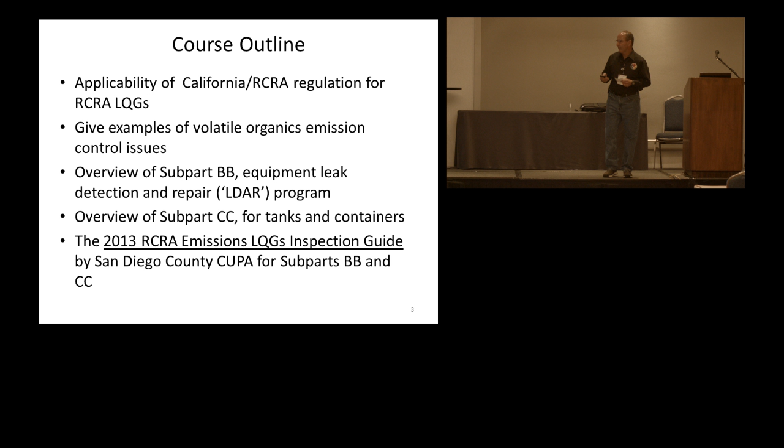We all know vapors can be dangerous. Three people were killed in Texas in the early 2000s. They were offloading a tanker full of flammable liquid waste at an oil production facility for waste condensate, and it ignited and killed three people. It's typically the vapors that are going to be harmful whenever you're transferring volatile organics and there's an escape of vapors. There's been a lot of examples where the vapors have caused injury, usually burning or death in this case.

It's a very, very famous one. The Chemical Safety Board, the national program, did a study on this, all the things that went wrong, and it really was because of no vapor control being ignited by an ignition source nearby.

It's not just 10, 15 years ago, it's happening today. In Hanford, Washington, the Attorney General is suing the DOE and Hanford, where all the mixed waste is. There's about 170 tanks of mixed waste, a lot of VOC waste and radioactive waste. The workers trying to treat this stuff and stabilize it at Hanford have been getting sick from the vapors coming from the tanks. The state of Washington isn't happy with DOE and US EPA and the Hanford people that ran the facility. They're finally going to take a RCRA lawsuit to try and force them to manage the vapors and control the emissions, because people are getting sick.

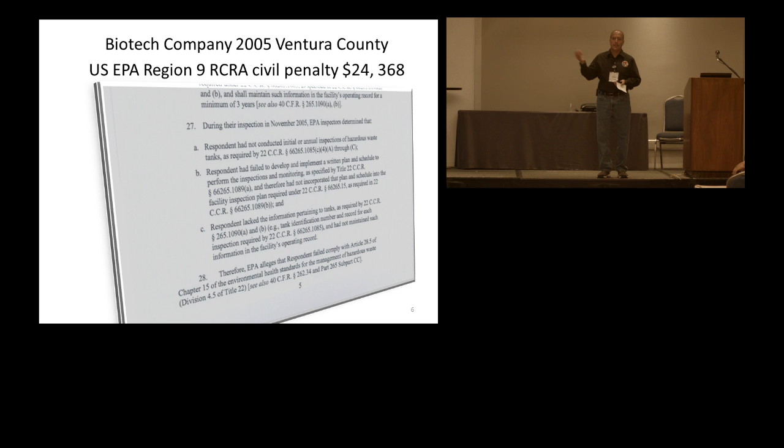The ones in San Diego we've done have been just the CUPA. But they typically go out there, find out the company has a lot of volatile organic waste with no emissions control, and the EPA calls it low-hanging fruit. It's a violation that's really easy to cite if there's no records or nobody's aware of it.

These regulations go back to the 1990s. Again, hazardous waste was something regulated by RCRA. But some of the emissions from facilities were a concern to neighbors because of the odors coming from these facilities, the ozone precursors, ones that destroy ozone, and the air toxic pollutants, things that cause cancer and so on. What EPA did is first make the rule for TSDs, and then they expanded the rule to LQG RCRA generators, so the whole country. Then all the RCRA authorized states were required to enforce the rule or adopt the rule, which California did in 1998. So it's been on the books for a lot of years.

So it goes through some simple regulations, but what is a volatile organic? For a lot of the businesses here, they kind of understand what it is, but here's the legal definition in the regulation for volatile organics using it.

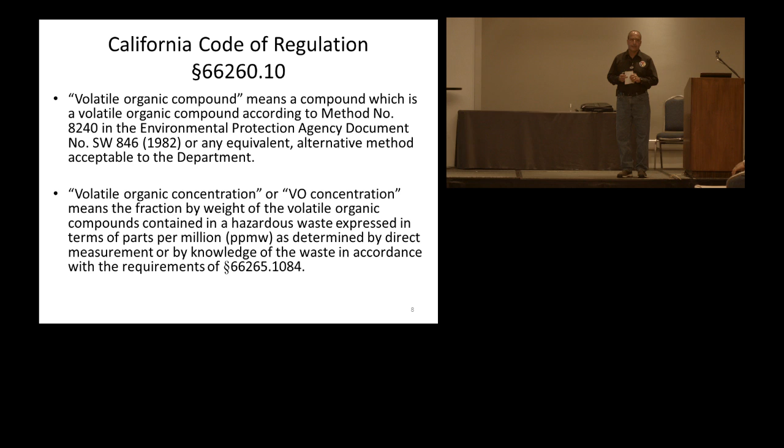The typical RCRA hazardous waste that are volatile organics, things like the spent RCRA solvents, your F-listed, the D001 flammable waste, aliphatic hydrocarbons, and then chlorinateds, and some RCRA TCLP organics, and there's others.

When I do an inspection, and I know it's a RCRA LQG, I'll look at the manifest, I'll look at waste profiles, I'll look at LDRs, figure out they got a VOC. It's pretty easy to do. I usually do that, and inspectors will do that in the office using the hazardous waste tracking system, looking at manifests, looking at D001, looking at their status as a RCRA LQG in CERS, because that's one of the questions for business activities in CERS, and the rule is going to apply. There's not many exemptions in California for this rule.

Vapors are everywhere in production, manufacturing. You're going to have vapors from tanks coming out through vent pipes, through condensers. I've inspected condensers at steam strippers and air strippers in San Diego that are treating wastewater with organics. You can have it from valves, from tanks here. So vapors are pretty much in all manufacturing if there's a flammable liquid being used or applied.

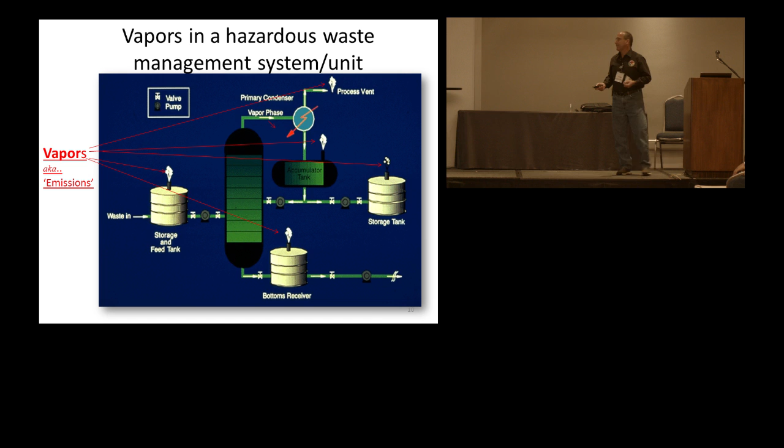Next 20 slides or so, I want to give you examples of some pictures from inspections we do in San Diego. This is one we did just a few months ago.

Biotech. This machine generates some waste solvent, goes down to the floor, I'll show you in a second. Then the piping for liquid waste goes up through the ceiling of the facility, and they have a PVC vent for the vapors from the production equipment.

That PVC vent is vapors from production, not regulated under Subpart BB or CC, because it's coming from a manufacturing process unit. Think of it like an auto body shop spray painting auto body paint. Those emissions are controlled by the Air Pollution Control District, not by these rules, because it's manufacturing solvent that's actually being evaporated off. These rules deal with waste, waste tanks, waste piping.

So this unit right here, the waste is the unit that we regulate under the rule.

When I did the inspection in November, I looked at this PVC and the chemical composition, and I said, are you guys sure PVC is compatible with your waste solvent? And it isn't. This is going right through the ceiling up to the roof. So now they're going to revise that piping, the PVC piping, because when they ran the chemical compatibility, it dissolves PVC. The solvent, methylene chloride, was the chlorinated one.

It's twice I've seen biotechs put PVC piping in with methylene chloride being one of the solvents, and it says if you do run a compatibility check, do not use PVC. I referred it to the Air Pollution Control District as well.

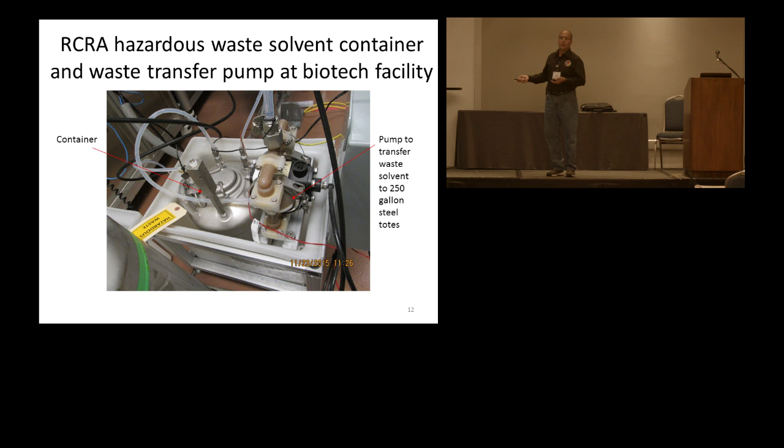So the volume was continuous. They did 9,000 gallons a year of waste solvent, and they were in production. This company had, I think, peptide manufacturing, peptide synthesis. They would transfer it from this little pump through some flexible piping that was double-walled out to the totes in the 90-day area.

Close up on the pump. The metal tag was a good indicator that this company knew about the air emissions rule, because you're required to actually tag your equipment with identifying equipment markers. So that was a good indication when I first looked down and saw it that they had a clue about this rule. It's a national company, so they've had Subpart BB and Subpart CC inspections in other parts of the country from other regulators.

Ultimately, that pump took it out here to their 90-day area, and the vapors dropped into an activated carbon drum, incoming and outgoing. What caught my attention was they had no label on it for activated carbon. This is to control the vapors coming from the totes.

And then they had a little pipe connected to an exhaust system. So what they kind of developed was something to suck the vapors from the totes over to activated carbon and treat the vapors like the rule requires. It's called a control device. Activated carbon is very common, but they put a little vacuum on it by putting it into an exhaust system.

So I was a little concerned about that. I saw that they had metal tags hanging from everything, again a good indicator that they're complying with the air rule. But I was concerned that as they pulled a vacuum in and out to suck the vapors out to the roof, they were saturating the carbon, and it actually did occur.

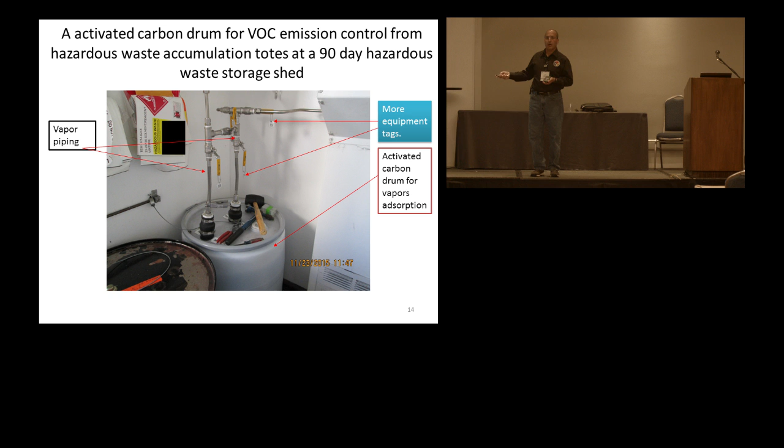So 95% of the vapors need to be collected or adsorbed in the carbon. They saturated it way quicker. But they purposely had this vacuum designed by the engineer to draw the vapors to here.

A lot of the regulations I'm talking about are found on EPA's website, which has a really good resource to look up the regulations for air emissions. So I put the web link.

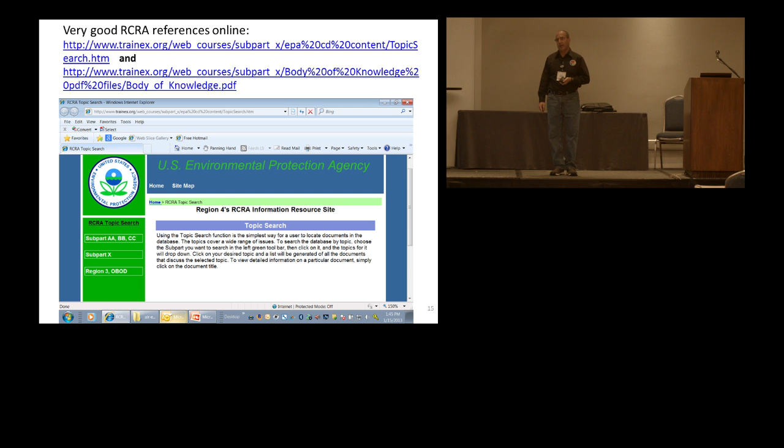Applicability is RCRA LQGs, so your 90-day hazardous waste generators. Got to be RCRA waste. Containers that are more than 26 gallons in size. We'll go through that a little bit later in more detail.

And the regulations are found here in California. Like I said, they adopted these regulations in 1998. The feds call this Subpart AA and BB and CC. California calls it articles. So when I refer to AA, BB, and CC, it's really the articles in Title 22 California Code of Regulations.

And real important, if you're a generator or inspector, you don't apply these rules to non-RCRA waste. It's got to be RCRA waste. So it doesn't affect non-RCRA generators for California only hazardous waste, which is kind of a relief for a lot of businesses. We don't have very many RCRA LQGs, but I'll go through some examples in further detail.

We made a guide in San Diego. I haven't revised it. It's pretty much the rule has been static since 1998, so it's still valid. Can you use it? Again, I uploaded it to the website, and we have it on our county website as well for the CUPA in San Diego.

When I looked at the EPA regulations, they were so confusing, and California adopted them. A big part of transferring it and making a guide was just pretty much making sure the regulations, the numbers matched or corresponded, and that was the big time-consuming task, because California has their own numbering system, of course, and their own reference, Title 22.

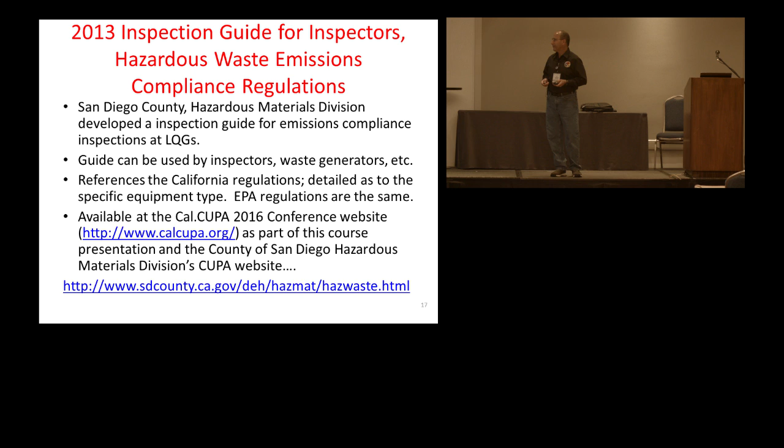Some of the examples we'll go through: Navy training torpedoes, a large Navy base in San Diego. They have to clean their training torpedoes. When I heard about this, I go, wait a minute, torpedoes, those things, don't they blow up during their training? Well, they actually have ones that don't blow up, and they go and retrieve them, bring them back to Point Loma in San Diego, and then they have to clean them out.

The fuel inside these torpedoes is very toxic, and they have to use a solvent to clean it out. Mineral spirits is what they use, and it generates a lot of VOC waste as well as reactive waste, so it's pretty nasty stuff. The fuel's like $300 a gallon. It burns underwater, of course, and it's very expensive.

Aircraft stripping operations. The Navy has giant aircraft stripping where they strip off coatings with methylene chloride. They're trying to get away from that, and they will have a lot of waste generated from that process.

Pharmaceutical manufacturing is the most common one I've seen in San Diego besides the Navy. They have a waste solvent transfer system. So if you're a business designing one for waste solvent, if you're a CUPA inspecting one, a waste solvent transfer system, they're sort of in vogue.

I have plans on my desk now from a large biotech wanting to put one in from their labs and production out to their 90-day shed. And they want the county to look at it and see if the required rules apply. Is it a tank? And they don't want to be a tank system. And the air emission rules apply. So they pay the county for consulting services, and we're looking at the plans.

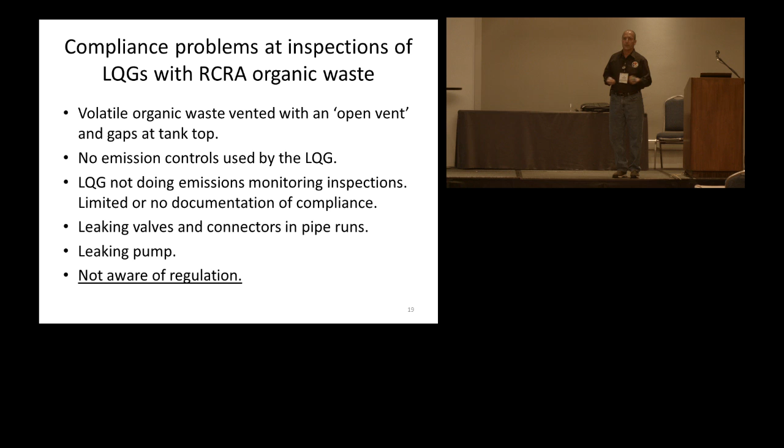Some general rules with vapors: the higher the vapor pressure, the more volatile. That's obvious. Gasoline, methylene chloride, all those are really high vapor pressures. The vapor pressure of water is 2.3.

Compare that to methylene chloride, 45.2. So you can see how, if you ever used acetone for wiping, it evaporates very quickly. That's the vapor pressure for acetone.

The higher the temperature, the higher the vapor pressure. That's a pretty standard rule. And vapor pressure is the measurement above the liquid in a confined, closed system.

Generators, inspectors, the manifest tells you what kind of waste it is. This is an example, waste flammable liquid, 4,400 pounds.

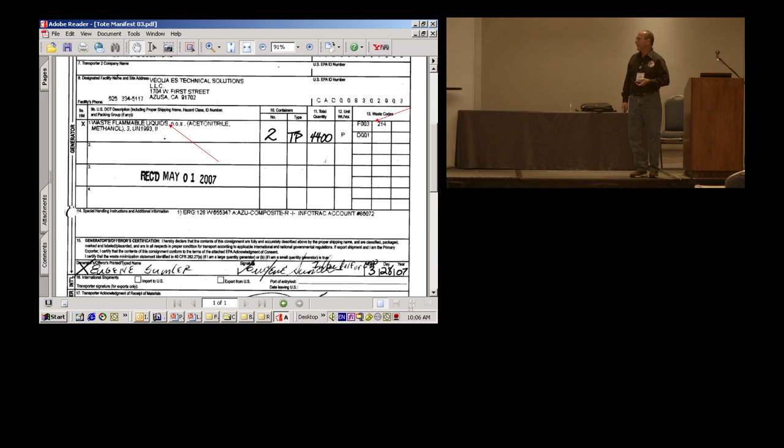Company that had, again, a waste solvent transfer system, biotech, very large and well-known biotech in San Diego. All their waste went into these totes in a small room inside the building. It was well above capacity. They were always filling these totes up daily because their manufacturing took off.

The product took off after FDA approval. So they had real problems with vapors. They opened the doors up, and the vapors were really, really bad. The manager said, we're trying to get this moved outside. It's a capital improvement, $1 million plus.

They wind up doing that. They had done a health and safety analysis for workers, a health risk assessment, and it was really bad because of methylene chloride as well as some flammable liquids. They had a wall duct that tried to suck out the vapors, but they had no air district permit.

So in San Diego, for biotech, there's a biotech rule where the Air Pollution Control District—I don't totally want to say I understand their rule in San Diego—but sometimes they'll require a biotech need an air permit, and sometimes they won't. In this case, they didn't require one.

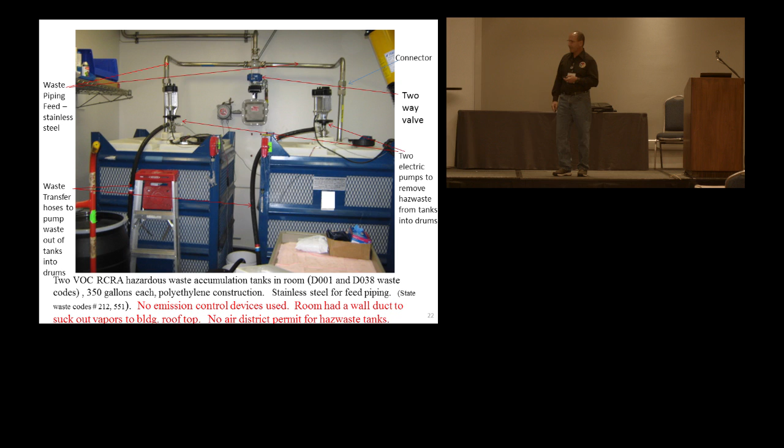That changed though. After they moved it outside, they no longer had the exemption, I guess, for the Air Pollution Control District, and they had to put in all kinds of special air emission control at the tank top—little motors, it was not very safe.

Flammable vapors, electrical pumps, just closed up on the top of the tank, transfer hoses. And the manager really wanted to get this outside in a big bulk tank. They wind up moving it outside. Instead of totes, they had a 4,000-gallon waste solvent tank with stainless steel piping, double wall, met the rule.

Spent a lot of money putting it outside. It was much better, much safer to do that. And they met the requirements.

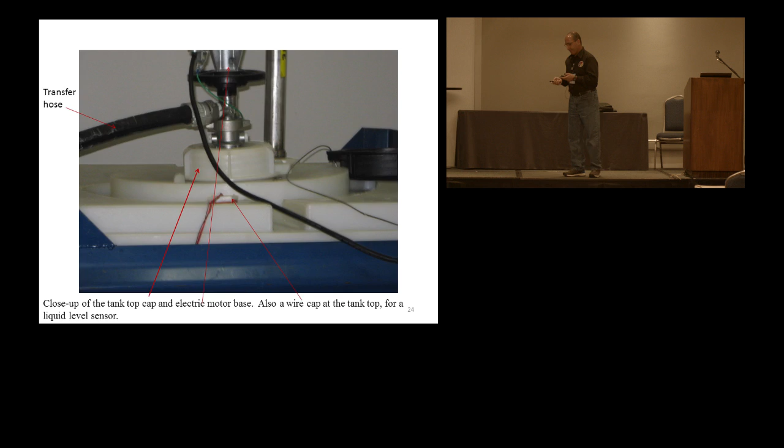Another biotech facility, they put a shed. The cap is open on top, hard to see, but they leave the cap open to let the vapors escape when they're filling it. The headspace has to go somewhere, right?

So they left it open. Not only do you have a generator open container violation, but you have a Subpart CC violation for emissions, because they leave it open all the time, apparently what they were doing. Because they had a transfer hose, and then they didn't want to remove the hose every day.

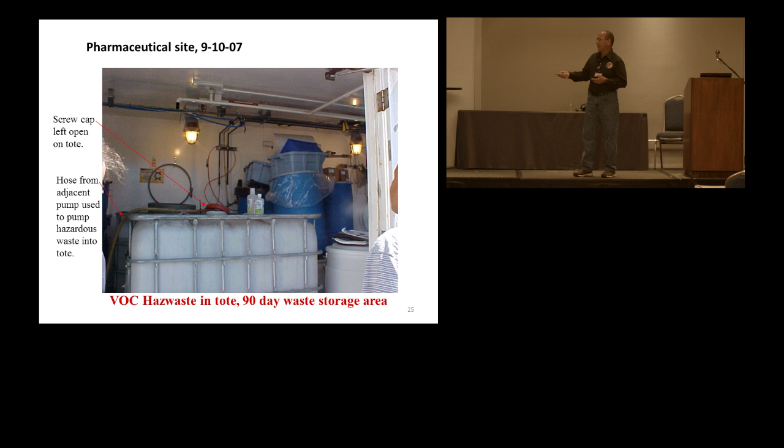Just a close-up on the hose and the loose cap. Very common with VOCs and totes for companies to leave a cap loose or off for the headspace to go somewhere. And if it's volatile organic RCRA waste, you've got not only an open container violation, but the air emissions violation as well.

This company, we didn't do enforcement because we wrote up all the violations, and then they complied. This was like 2007, so it was pretty fresh. A lot of large quantity generators are used to 90-day storage requirements, generator basic rules, contingency plans, CERS now, but they don't get this. So we have to kind of slowly help them.

That's why I made the guide.

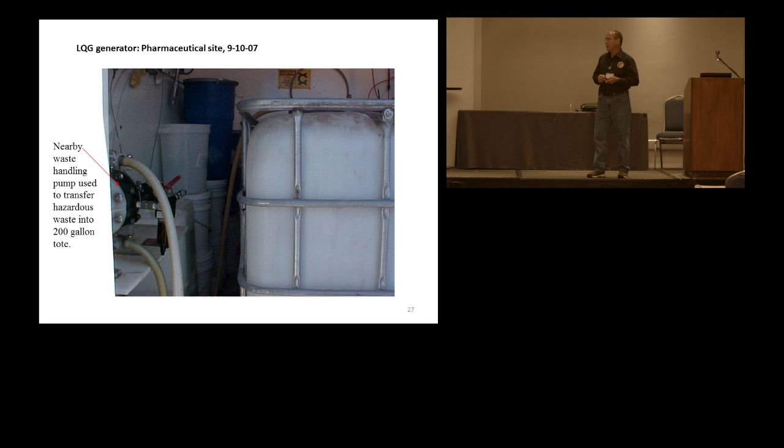This is the transfer hose. One of the rules you'll see in a little bit is when you're transferring VOC waste from small containers, drums and things, into a tote, you can't really have any top loading or what's called splash loading. Because if you're doing it from the top, it's splashing in and all your vapors are kicking out. You have to have submersible entry of the solvent or liquid pumping into it, so you have to submerge it down through a pipe or a tube. Makes sense. If you have top splash loading, a lot of VOCs will be escaping.

This is the violation we gave for the LQG. We not only did the generator violation for open container, but we cited they had the 200-gallon tote set up to allow vapors to escape pretty much 24/7.

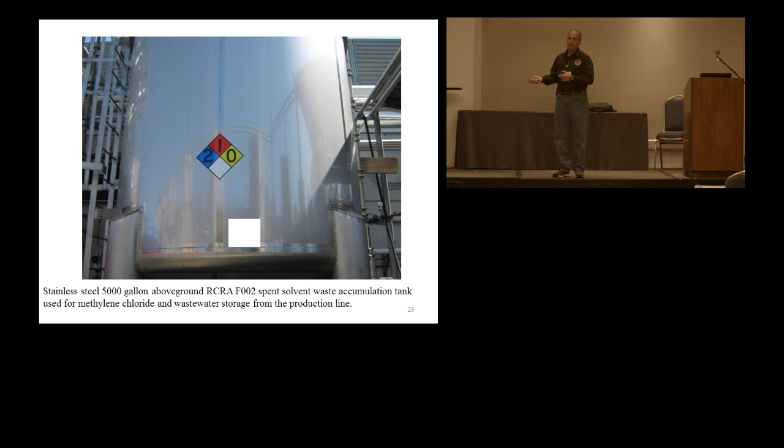This is a wastewater tank with methylene chloride, F002. So I know it's a RCRA solvent. They treat the methylene chloride in the wastewater to get the wastewater to meet sewer treatment levels, and then the methylene chloride is stripped off and then collected and disposed of as hazardous waste.

A lot of piping, waste solvent waste. So if you're an inspector going into a place cold and you see all this, you're not only thinking about hazardous waste tank system standards, but you should be thinking about Subpart CC and Subpart BB. In this case, all three rules - Subpart AA even applies because they had a steam stripper.

Manufacturing, the company makes a drug that they sell overseas. They got permission from FDA to sell it in the United States, and it's like a wonder drug, a narcotic they use for IVs in all kinds of surgeries. So they took off with their product in the last several years. They were doing R&D for 20 years, got FDA approval, and put this whole system in just to treat the wastewater, because they were continuously making two shifts a day of this IV drug that was in popular demand.

Again, just close up on the markings. If you're an inspector, you see that, you're going to think of tank rules, and you're going to think about the air emission rules.

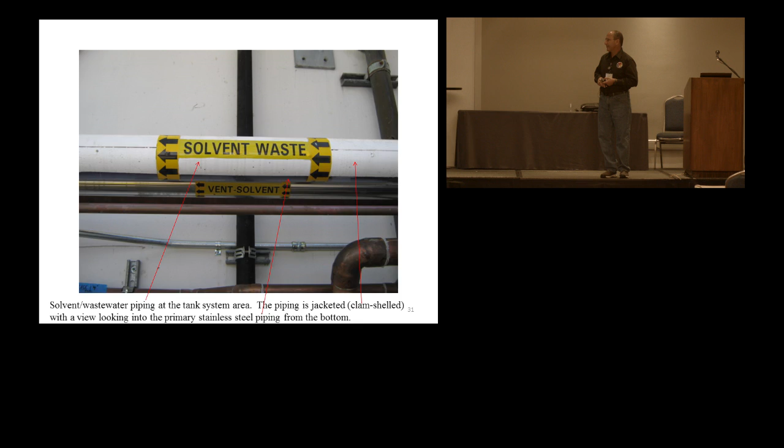It can be kind of daunting if you're an inspector to have to inspect all the piping. For this system, the wastewater had all kinds of piping and pumps, and they had manufacturing vapors coming out here from their reaction vessels where they were making the drug. They had liquids coming from the reactors inside the building. They had wastewater coming from the washing of the reactors - after every batch, they had to clean the reactors they were making the drug in. They had return lines, steam lines, all kinds of piping to deal with. So it can be kind of daunting.

I knew it wasn't in compliance. They had nothing marked. All the connectors need to be marked with a metal tag or some kind of tag indicating the equipment ID number and what kind of VOC waste is in that particular piece of equipment. So I knew right away they weren't in compliance with the Subpart BB rule for piping.

They were doing the PE assessment. They had it done for hazardous waste tank systems - double wall, leak detection, secondary containment. But they had no air emissions monitoring, which we'll talk about in more detail.

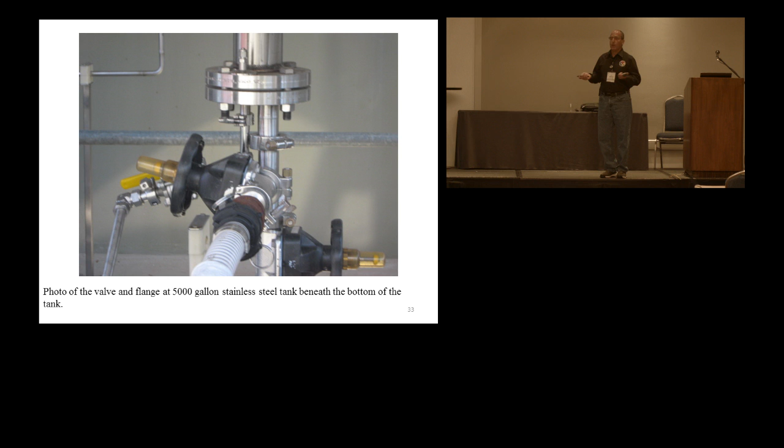Again, just close-ups - all these are potential leak points for vapors. And the thing about vapors is, as inspectors, we're all used to looking for drips, liquid, or maybe we smell some odors. Here you smelled odors all the time. They're doing 20,000 gallons of wastewater treatment daily - that's how much waste. So these things, for volatile waste, they can be leaking and evaporating and never drip to the ground and leave a stain or a wet mark. That's the insidious nature of vapors or vapor loss. And methylene chloride being toxic - not flammable, but pretty toxic.

Again, close-ups on pumps, just showing that nothing was marked, lots of connections. Companies spent a lot of money coming into compliance after this. They had to get a consultant, or at least they wanted a consultant who had experience in the air emissions rule. This is a steam stripper.

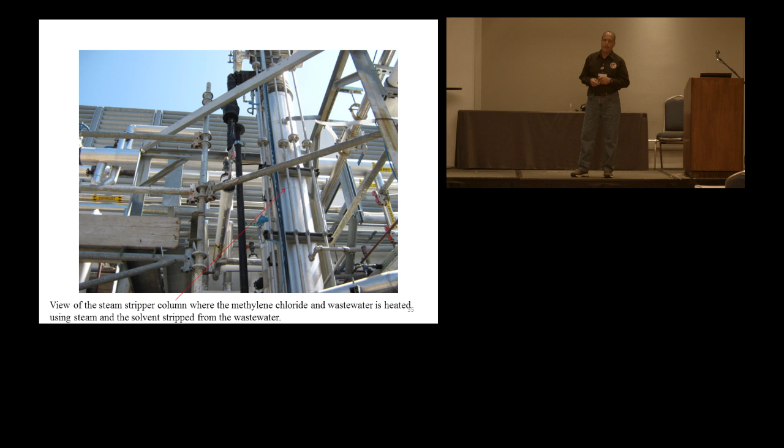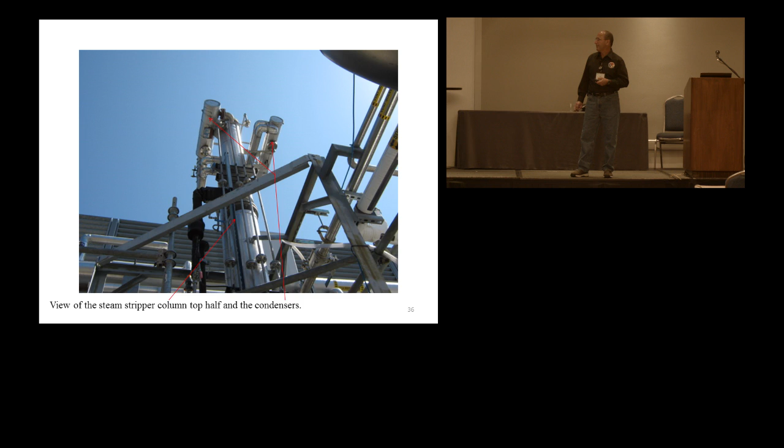They had to strip out the methylene chloride from the wastewater. Now they have two towers of steam stripping to strip out the methylene chloride from the wastewater. Just to show you - condensers at the top which condense the methylene chloride, and then you get liquid, you pump it down to a decanter or another storage tank for waste, which is what this is right here. They had about 200 gallons of spent methylene chloride that was stripped off from the steam stripper.

Very expensive, multi-million-dollar wastewater treatment. Refineries are going to have this. Manufacturing facilities are going to have this kind of equipment. LA probably has a lot more than San Diego, I'm pretty sure.

Again, just a close-up on the back side of what they call the decanter, which is their waste methylene chloride, with a little plastic sight glass.

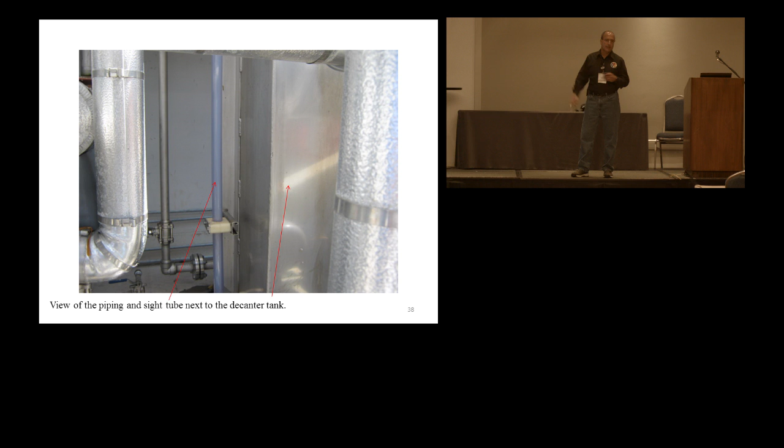When I see plastic and solvents, I start thinking about compatibility, because I used to do emergency response. In the old days, there were a lot of responses from leaks caused by incompatible materials, where they used plastic to convey or store a solvent, and it just eats away. So I'm really focused on that, and I've found a lot of problems.

Ultimately, from the decanter it goes into the drums. You see a pretty good VOC system, but nothing's being monitored, nothing's being tagged. So the violations were failing to have a monitoring and inspection plan, failing to identify the waste solvent on paper. They had manifests, that's all they had, and then marking all these connectors with tags.

Carbon adsorbers are common when you have VOC wastewater or VOC waste from totes. They're the normal rule for LQGs in pretty much the whole state. They're simple, but the problem is there are two types: ones you regenerate with steam, and ones you don't regenerate. Those go off in a drum, or get changed every 90 days or when they become spent.

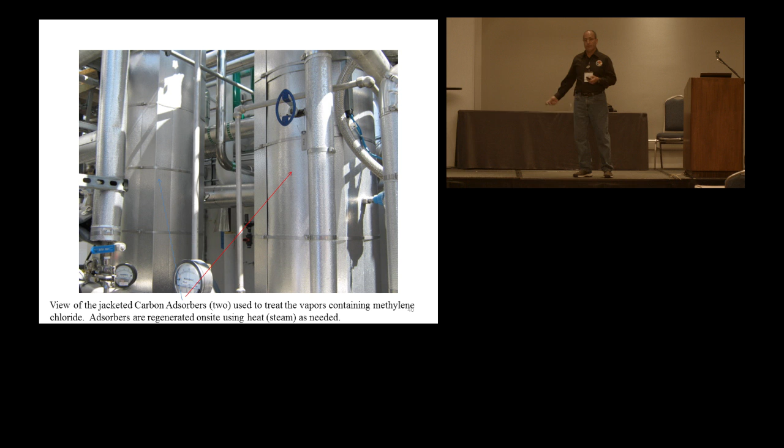Fuel terminal in San Diego. They have oil-water separators, really fuel-water separators, in the ground here. From over there, off the picture, is their loading racks for gasoline tankers. They have a spill, it goes into a drain with a lot of water, and goes down to the fuel-water separator underground, and they have to do something with that wastewater.

They don't have a sewer connection for this terminal. So they try not to have spills and overfills at the loading racks for the gasoline terminal, but they have them every day.

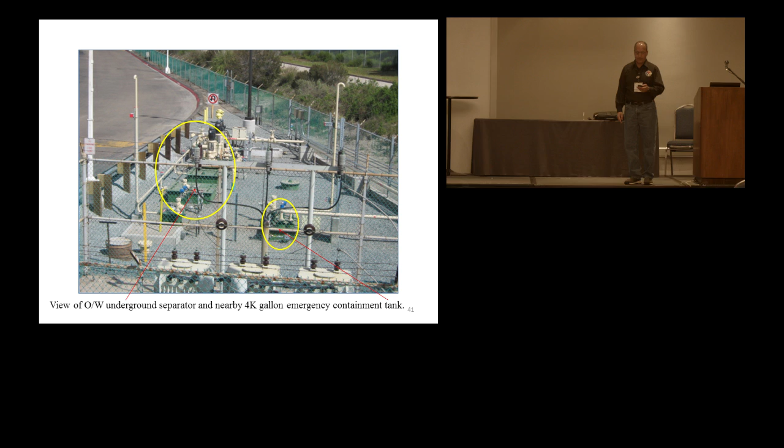Ultimately, the wastewater from the oil-water separator goes into an 18,000 gallon tank. That's right here, and that's the label on it. It's hazardous for benzene and gasoline - residual, not pure product. It's really wastewater with some benzene, RCRA TCLP organic benzene, and some gasoline.

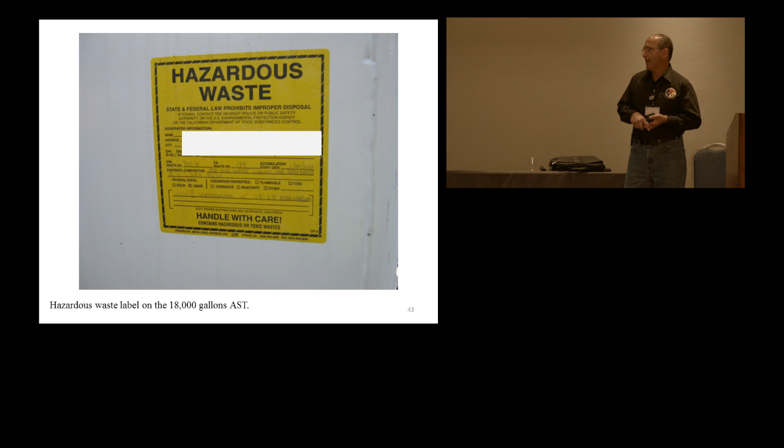So what I had them do when I saw this, I asked how they were venting that 18,000 gallon tank. They had a vent that looped up and over. I asked if it was an open vent, but first I asked, is this a VOC waste? They said yes, it's RCRA benzene with benzene and water. I said, give me your waste profile, your sampling data. They gave me the data back, and ultimately it was below 500 parts per million, so they were not subject to the regulation.

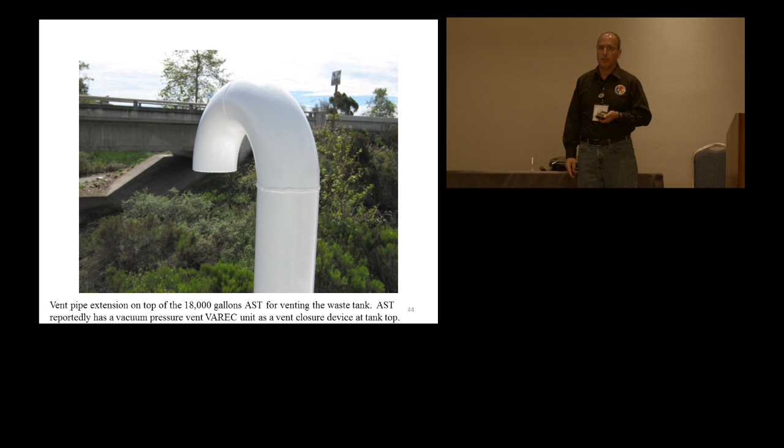They were just barely below, which is a threshold we'll talk about in a bit. But I brought out a PID, a photo ionization detector, held it up here, and got about 200 parts per million in the vent. I'm thinking there's got to be 500 parts per million or more down in the tank, so I made the generator do a waste classification for volatile organics.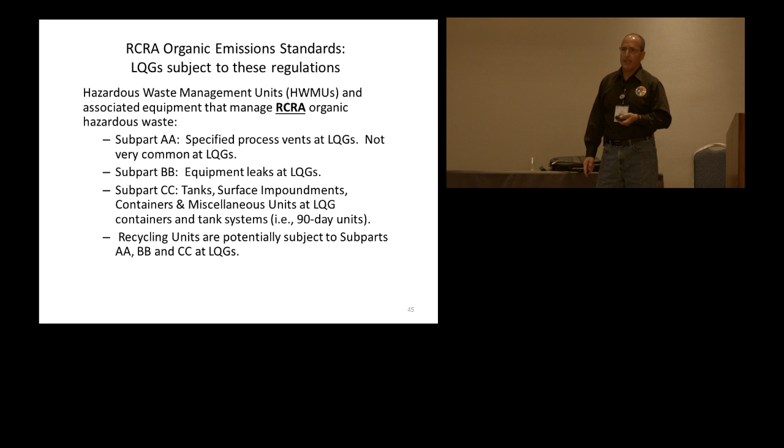The lack of awareness by LQGs, and by inspectors, is pretty high right now, I've seen. A lot of times they'll think, well, the Air Pollution Control District regulates me, why is the CUPA asking questions about it? But depending on what rule they're complying with at the air district, they may still be subject to the air emission requirements.

The last one I did just a month ago, the consultant and the company came and said, we have an air permit, we're exempt. And I said, well, you have to do this, this, and this to meet the exemption under RCRA, which is pretty much meeting the Federal Clean Air Act - which they weren't meeting, they were meeting a local rule. So they went back to the drawing board. I'll talk about that more.

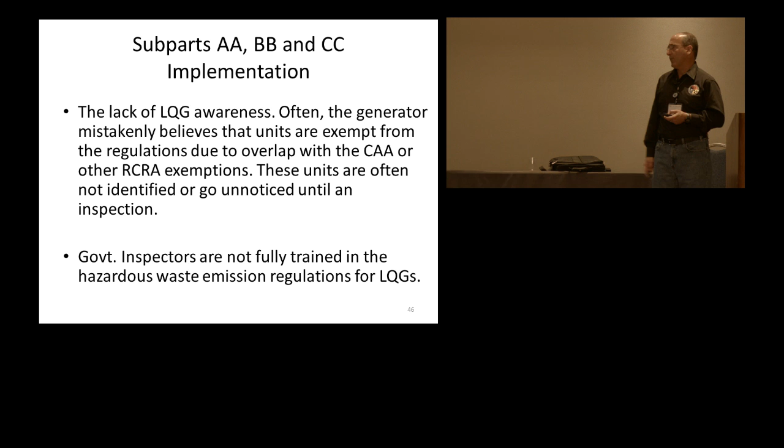And inspectors aren't really trained or fully trained, so we're trying to get the word out. It's authorized by the EPA - states have to do this as part of their RCRA program.

And again, for LQG RCRA, it's usually BB and CC. A lot of exemptions under the federal rule do not apply in California, because California does not adopt a lot of the federal exemptions.

They're really specific to equipment, and we'll get into detail about that. And as I mentioned earlier, if it's production solvent vapors, that's not regulated by this rule. It's the waste part of it, the discards from production.

Usually the manufacturing, like Air Pollution Control District, that one - methylene chloride wastewater - they regulated the heck out of the production area, the reactor vessels and things, where methylene chloride was going in pure concentrations. And all that VOCs from manufacturing had an air permit. But the wastewater, which was trace levels to them, below 1% but above 500 parts per million, which is the regulatory threshold we're going to be talking about, they go, oh, the CUPA handles, or the county health handles the wastewater. We only handle the vapors from production, manufacturing, coating, and so forth. So there's a loophole in some air districts where they focus on the pure solvent being used, coming off manufacturing, and they don't focus on wastewater with low levels of VOC.

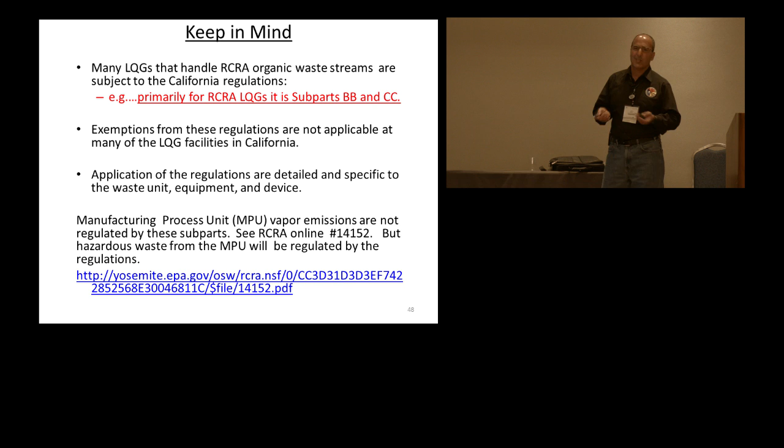If somebody says an LQG isn't subject to the rule, they have to meet, like I mentioned, Clean Air Act parts - one of these parts - with performance standards for stationary sources and national NESHAPs. They have to have operating emission controls, and they have to have records. Everyone I've done who's verbally said we're exempt because we have an air permit, they don't meet these three. They haven't met one yet.

Now in LA, South Coast Air Quality Management District may be tougher, maybe a little bit more looking at the federal requirements, because LA has more challenging air emissions than San Diego. But in our air district, they don't really look at parts 60, 61, and 63 of the Clean Air Act. Usually these are major manufacturing facilities, like refineries and chemical manufacturing facilities, that have to meet these rules for wastewater, waste solvents, waste coatings, and fuel production.

If there's an exemption they claim because there's an exemption in the federal rules - well, you're not going to get out of Subpart CC by saying you're exempt from the Clean Air Act. And they have to have emission controls. They can't average out their emissions and so forth. It can be a little challenging for businesses that come in and say it's not applicable, that they're exempt. But like I said, in 100% of the cases, no one's been exempt.

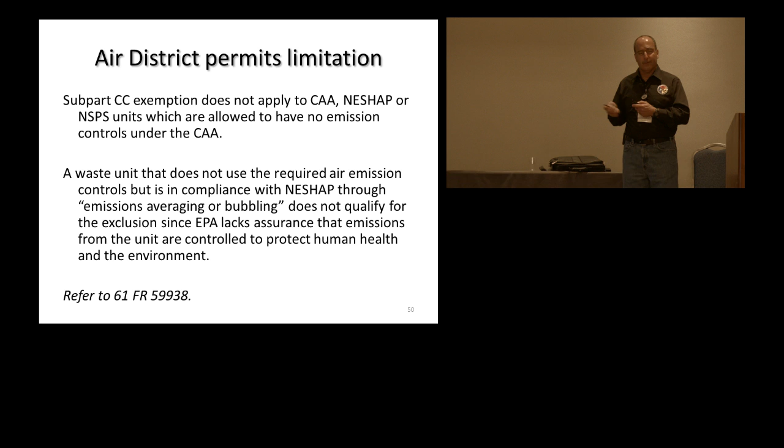And EPA has been interested in this topic. Region 9 hasn't really done a lot of outreach, but they've been interested because I've kind of been pushing it more at the CUPA level, at the higher level. And so they say they're going to make it a priority in the future as part of their air toxic initiatives.

And again, as I mentioned, sometimes they believe the air permit exempts them. And that certification is a scary thing if the person's just signing it and not really realizing what they're signing. One company was going to do it, but I told them to really think about it, because they don't have any equipment ID marked. See, the one thing about the overlap is the Clean Air Act.

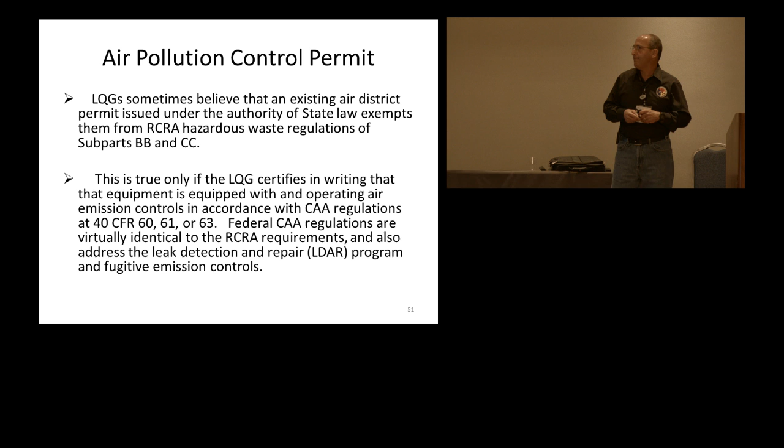If you comply with the Clean Air Act, the same rule applies - that's the exemption where you don't have to meet Subpart BB because you're already meeting the overlap rule. So the equipment has to be marked. You have to have a monitoring plan and inspection schedule, and when they don't have it, they're not meeting the Federal Clean Air Act. So it's something that needs to be looked at.

The key thresholds are 10 parts per million by weight for AA. Subpart BB is your leak detection and repair - that's greater than 10% by weight. And Subpart CC, for tanks and containers, is 500 parts per million by weight.

So AA is your air and steam strippers - that's what that regulates, process vents from that. BB is your piping, pumps, and valves, your piping runs. And CC is the end, which is your tank or containers that have a VOC waste.

A little bit of nuance about AA and BB. The total organic concentration, where CC is an average volatile organic.

The biggest issue is when I ask for the waste determination from the generator, they'll give you a profile, they'll give you a manifest, and it may work, but this rule actually has a waste determination regulation in it. It says you shall determine your organic concentration for your volatile waste and keep records of it by knowledge or by testing. We'll go through that in more detail in a second. And if anything changes, they need to update it.

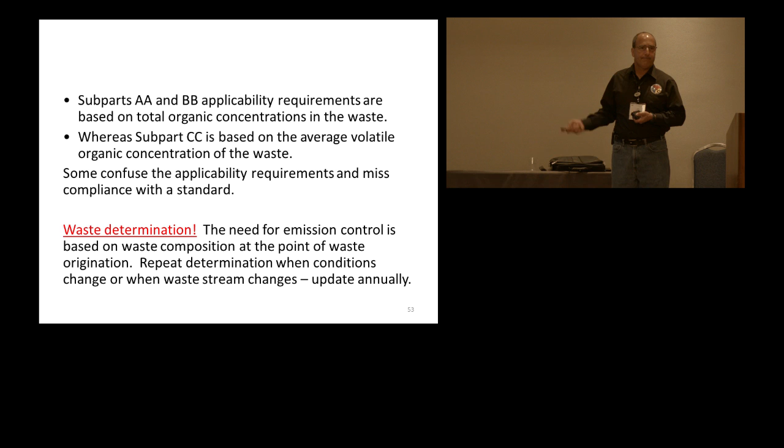The ones that have done sampling, I tell them to be careful because if they do it wrong, a lot of volatile organics escape if they're not doing it in a measured manner. If they're just throwing it into a jar with a lot of headspace, the volatile organics will escape. So there's a certain unique way of sampling volatile organics with minimized bubbles, zero headspace, and the right sample jar. It's totally critical. They can't just use a mason jar or a big 16-ounce jar like we're used to using in the CUPAs when we take samples.

It's got to be representative. If they sample the waste not at the point of generation, that's not representative. It's got to be at the point of generation, not in a consolidation tank, down gradient.

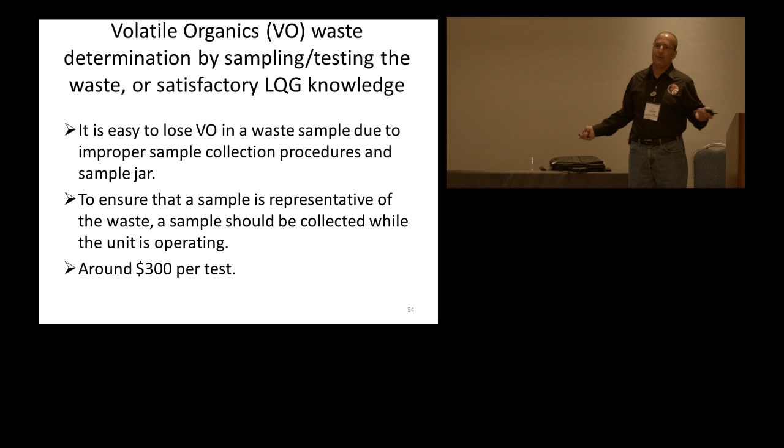So they can demonstrate compliance through record keeping and implementation. Employee training is important, for the employee assigned to go out and do the leak detection and vapor monitoring. And they can kind of do it at the same time as doing their tank system inspection, if they can.

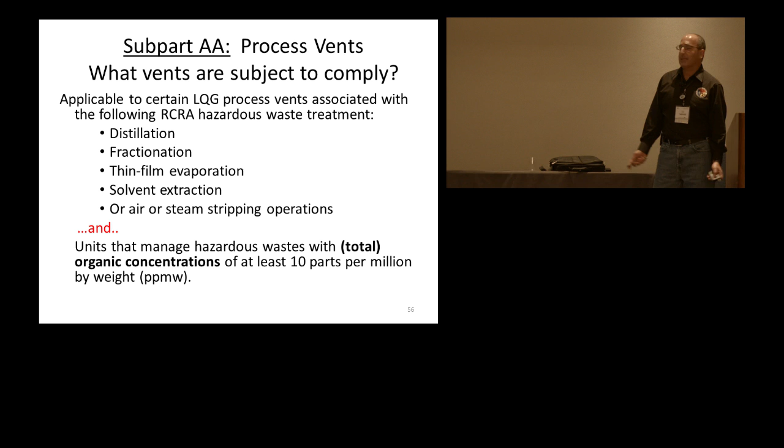Subpart AA is really, for LQGs, about air or steam stripping. These waste treatments for solvent are not very common at LQGs. Some may have distillation for solvent recycling on site, but these are typically TSD facility operations or bigger facilities. And again, 10 parts per million is not a lot to be subject to Subpart AA. That's very little in the waste, but it's got to be RCRA waste, just to emphasize that.

The definition of process vent in AA is pretty much an open stack or open pipe that needs to have a control device or a closure device. I'll give examples of that in a little bit, when it's associated with that solvent treatment or VO treatment.

The biggest thing about AA with the steam strippers and air strippers is they have to have control devices on all their process vents. Nothing can be open, evaporating 24/7 to the air.

Now, because AA is so uncommon, I'm going to focus on BB and CC, which are very common at LQG RCRA generators. But again, that's for tanks, containers, and piping with volatile organic waste.

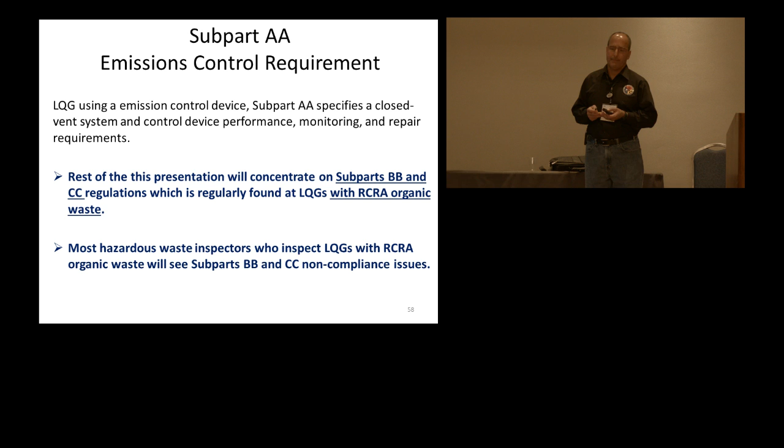BB is called the LDAR, Leak Detection and Repair Program. So it makes the generator inspect for leaks and repair them. They have an active program in place, meeting basic requirements in the rule. And really, the whole idea is to make sure the facility cares about their vapors, about vapor loss and leak detection.

Because if something is leaking and weeping very slowly from a pump or from a valve or a connector, and it's highly volatile, you don't see a drip. You may smell it, but there's no sign of leakage if it's highly volatile and you've got a weep occurring. So this program captures those leaks using monitoring.

Again, RCRA LQG, and then 10% for Subpart BB. So that's a much higher concentration of volatile organics for the Subpart BB rule, 10% or more.

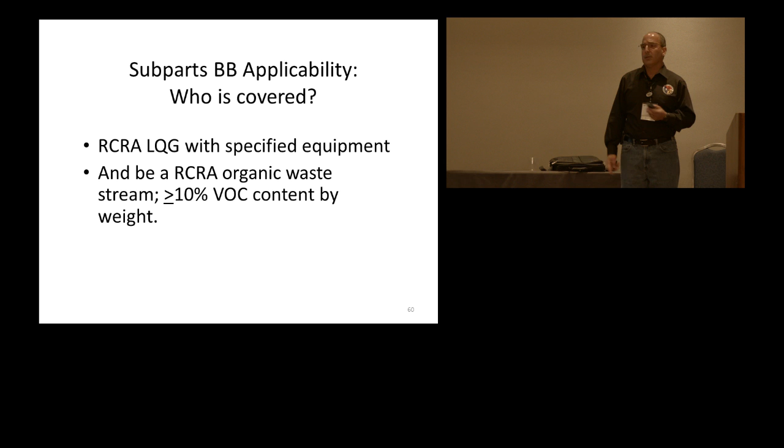And for anything that's flammable liquid waste, the thing about CERS is now for waste, they put the composition or components and percentages in CERS. I can look at a CERS, see they're a RCRA LQG, look at their inventory in CERS, see the waste composition, and before I even get in my car to drive to a facility, have an idea whether they have more or less than 10% VOC in their reported waste in CERS. CERS has been a really good tool, as well as the hazardous waste tracking system that regulators have access to.

All this equipment is part of the BB rule. Pumps, compressors, devices, sampling connection systems, open-ended valves, flanges, and all those things at the bottom - the pumps, the valves, etc. - they all kind of are common at LQGs.

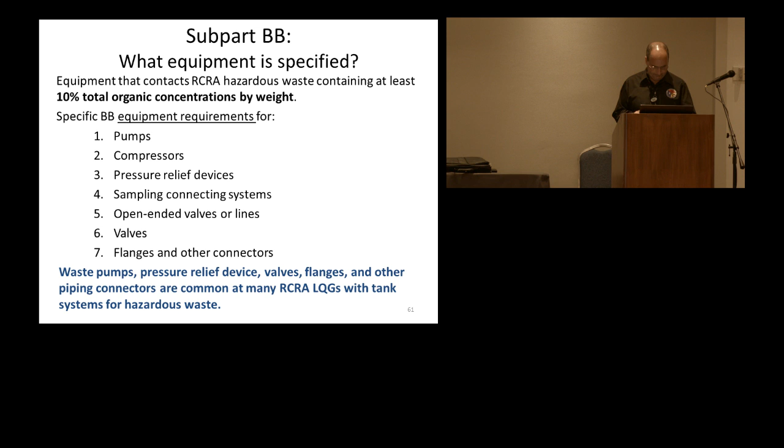There are some exemptions in BB: less than 300 hours a year for the piping, equipment's in vacuum service, and of course SQGs are exempt and non-RCRA is not regulated.

The 300-hour thing - one of my generators said we use our piping intermittently, and so we added up through the whole year, and it's like 200 hours, I forget the actual number. And I said, well, you look at the Federal Register about this rule, and EPA says to get an exemption for BB for the 300-hour rule, after you finish your intermittent transfer of waste solvent to your tank, you have to then flush it with a clean material and decontaminate it. If you don't decontaminate it, the 300-hour rule is not going to work, because they want you to decontaminate the piping run between intermittent use in order to use that 300 hours or less.

They weren't doing it, and so the 300-hour rule didn't work for the company that said, hey, we're exempt, we're less than 300 hours - and you got to flush it through and clean it. The idea being, EPA, when they made the rule, they gave the reasons why you decontaminate the piping and clean flush. It made sense when you read the rule.

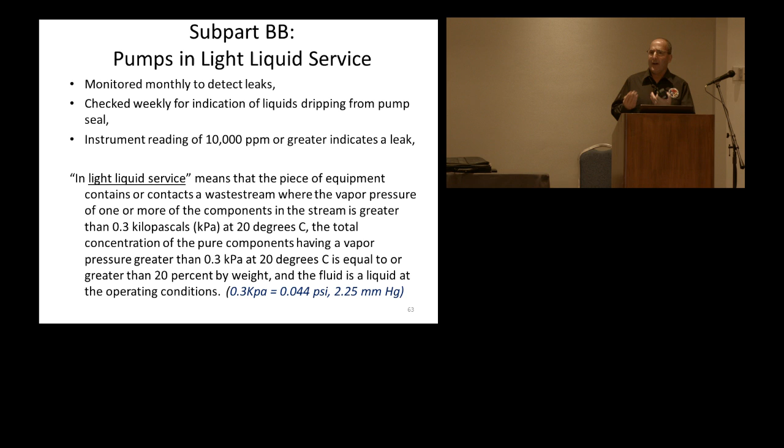Each piece of equipment in BB has different monitoring standards. For light liquid service, which is more highly volatile waste versus a heavy liquid - we'll talk about in a minute - you got to do a monthly monitoring and then visually check weekly. And then 10,000 parts per million on a PID, photoionization detector.

So the money to comply with this rule for a business - you got to have a PID, employee training, PID calibration, tag all your different piping run and all your valves, connectors, pumps, etc. So there's a lot of upfront money as well as continuous money that has to be spent if you're dealing with this rule. So businesses don't like this rule, but if they're in, they're in, and they would have to get away from the thresholds and the volatile organics.

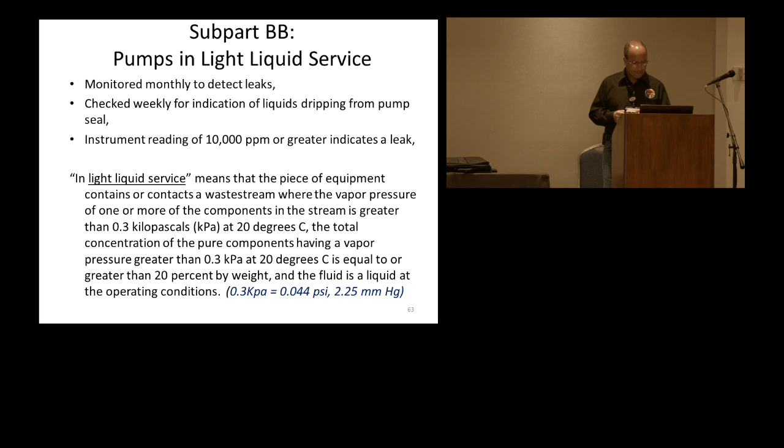Pressure relief devices, again, just measuring it to see with a PID typically, and repair it. Pressure relief devices - other states have done this rule much more than California, believe it or not. Illinois, Indiana, Texas, even Louisiana, which doesn't regulate a lot, because there's a lot of chemical manufacturing.

And they find that pressure relief devices don't seat completely after they get old, especially on outdoor equipment. And when they don't seat, they're just evaporating. They're not sealing. And so they stay open, because the weather extremes in that part of the country are usually hot and cold and heavy rains and outdoor harsh environment, versus us - we struggle with our weather every day, being too beautiful.

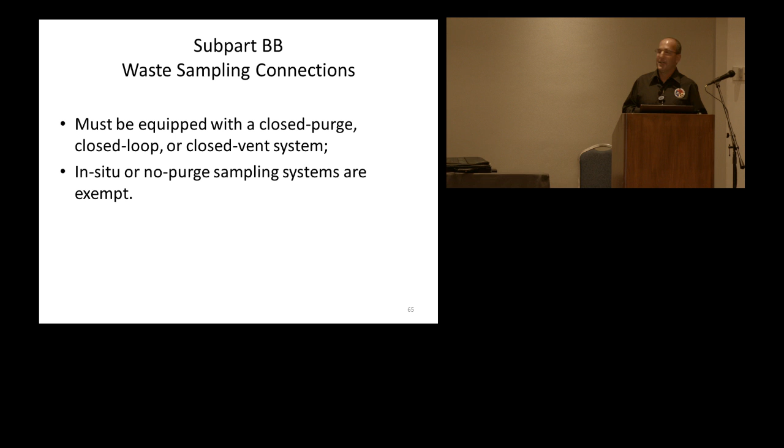Waste sampling connections - you can't just have an open sampling connection. For BB, you can't have any open-ended valves or lines. So if you have a terminal valve at the very end of a piping run, you have to have a cap at the end of that, on the exit side of the valve. Just can't keep them open. Because what happened was EPA had to do a study to make this rule and show there's a lot of vapor loss occurring at connections, at valves, at pumps, and they came up with the standards to stop the vapor loss.

The unique thing about hazardous waste vapor loss is - this is a given - industry cares about losing product vapor. They really do, I mean, that's money, that's money in the air. But the waste side of things, sometimes the industry doesn't have the same push to control the vapors. Because if you're losing fresh solvent, you're going to lose money. But on the waste side, it's something that's sometimes not remembered, that you have to comply with the rule as well.

Valves in gas vapor or light liquid service, again, a highly volatile, more volatile liquid - the leak threshold's pretty high. When I first read the rule, 10,000 parts per million - but really a PID, 10,000 parts per million, you're out there sometimes outside the facility, in the back of the facility, using the PID. They didn't make the threshold really low. I mean, the capability of the equipment, the situation, operational situation of the equipment - so 10,000 parts per million is realistic.

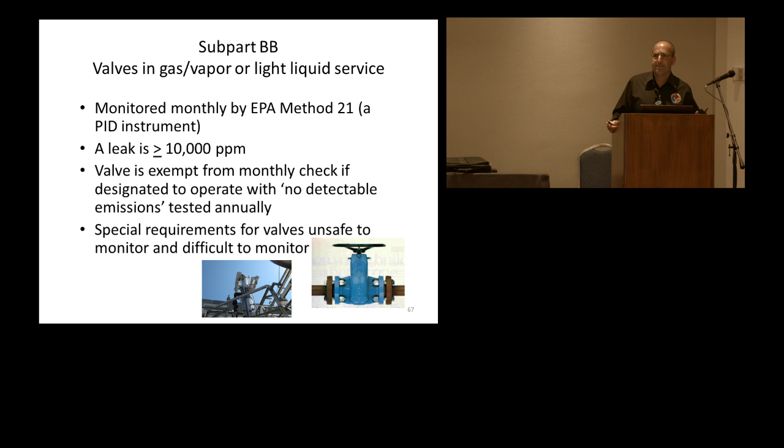If you have unsafe to monitor or difficult to monitor equipment, a company can say, I'm not climbing on the steam stripper and looking at those valves every month with a PID. So they can write in their own monitoring and inspection plan, unsafe to monitor, difficult to monitor, and put a frequency less frequent than monthly. They can say once a year, but they have to put it on paper and justify why. What I tell them to do is look at the valve manufacturer or the condenser manufacturer and make sure they buy off on your monitoring less frequently, and justify it.

For everything else under Subpart BB, you have to use your visual, audible, olfactory methods, your nose, for leak detection. You've got to make repairs quickly, within 15 days. If you can't get the pieces of repair equipment, you have to put in your log that you ordered it and it's going to take 30 days to get here. If it's not a really bad, unsafe leak, say 11,000 parts per million of something, and it's not a safety or fire issue, you can justify it and you're okay for the most part.

But if it's a highly toxic vapor coming out, the fire department, air pollution control, and even the CUPA will probably say, do you need to shut down that piece of equipment? And the company will say, we can't shut down, we're going to have 45 people lose their jobs for a month while we wait for the equipment to come from Germany or something. So if they justify it and it's not a safety issue, it can be allowed to go more than 15 days.

As I mentioned, just document if there's an unavoidable delay. A lot of record keeping is required. As I mentioned, the equipment ID numbers or tags, the location of it, type of equipment, the percentage of VO in the waste equipment. Is it 5%? Is it 20% in a valve, volatile organic? They just document it all.

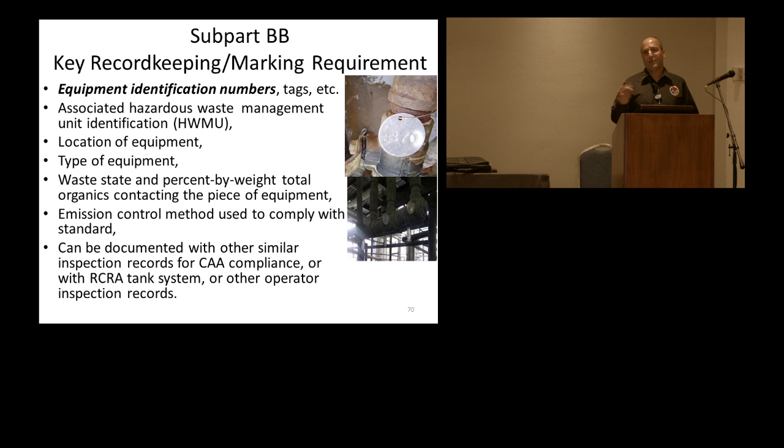So the company I'm working with right now, they know this rule. They're figuring out which vapors, which liquids are going to which area, which piping runs, how much VO waste is in that piping run versus another piping run, and they're documenting all of it. They're making the engineer calculate all that out as part of the specs. Building it from scratch is much better to do than building it and then, of course, getting it inspected afterward.

And if you have a leak, you even have to tag it. That makes sense. And record everything.

Now we're going to Subpart CC, the last part, which is tanks and containers. There's a really good training website EPA has on Subpart CC, tanks and containers. Think about tanks. You can have breathing losses from the daily temperature changes. Normal, they call it tank breathing. Headspace is going up, headspace is getting hot, getting cold. Liquid is getting hot and cold.

Think about a waste VO waste tank in Imperial County in the summer versus a tank in Santa Barbara. The extreme is probably a 40 degree, 35 degree difference or something. So a hot steel tank in a desert is going to evaporate much more than normal breathing loss through an open vent. And working losses are vapors that come off as you're filling the tank up.

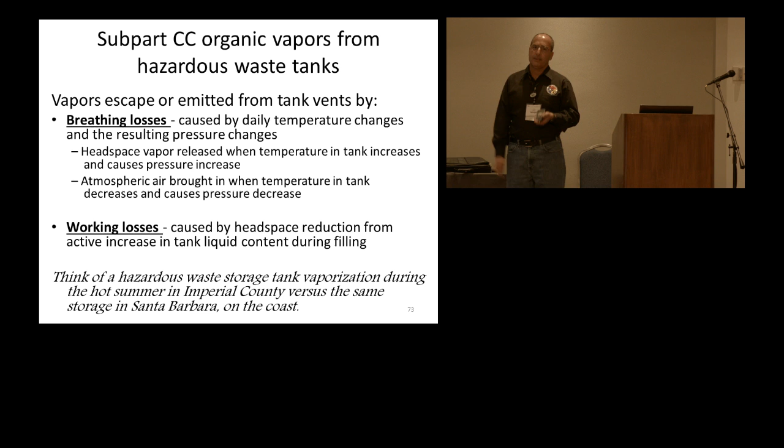Again, this is RCRA waste we're talking about, and 90-day generators. This is where businesses will say, where does it say I have to comply with air emissions? It's in the accumulation requirement, 34A1. Again, 500 parts per million by weight, not a lot, triggers this rule for VO containing waste.

California does have exemptions, though, for Subpart CC that apply. Satellite containers, just normal generator rules apply, you don't have to have a closure device, you don't have to have control devices on satellite accumulation. Of course, SQGs and CESQGs, if it's a small container, it's exempt from the rule. Mixed wastes, units in closure, universal waste, if you have a federally compliant unit, and RCRA empty containers.

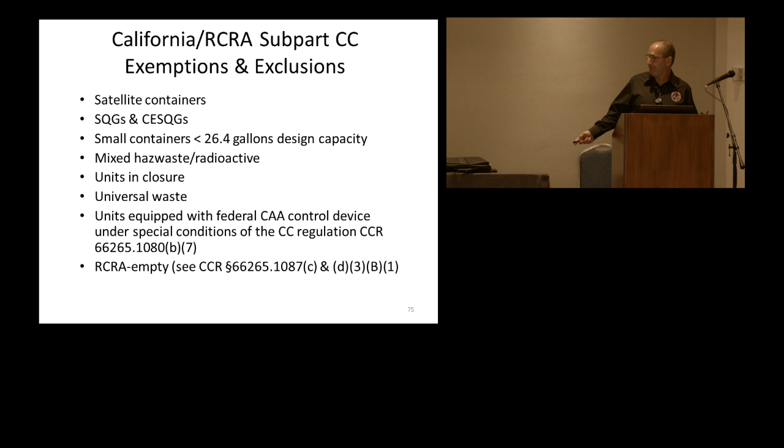For your concentration of volatile organics, you can do it by sampling or by process knowledge. The rule actually says 4 samples if you're going to use sampling. So what does the industry usually do? They usually use knowledge. For an inspector, it's a little more challenging if the business says, my knowledge is it's 400 parts per million by weight, but the inspector is like, I'm not buying it.

So what you have to do, if the company insists that they're below 500, you got to sample and prove them wrong, and then because you had to do all that extra enforcement, in San Diego County, it's a graduated enforcement to the very top because the business was wrong. The environmental manager was totally not getting the hint that maybe they should do 4 samples, and you can really see it.

If the waste has a lot of volatile organics in it, and the manifests are showing it, and the profile shows it, LDRs are showing it, I try and convince the manager the paperwork is showing higher VO concentration than 400, and sometimes it's sort of the ostrich with its head in the ground.

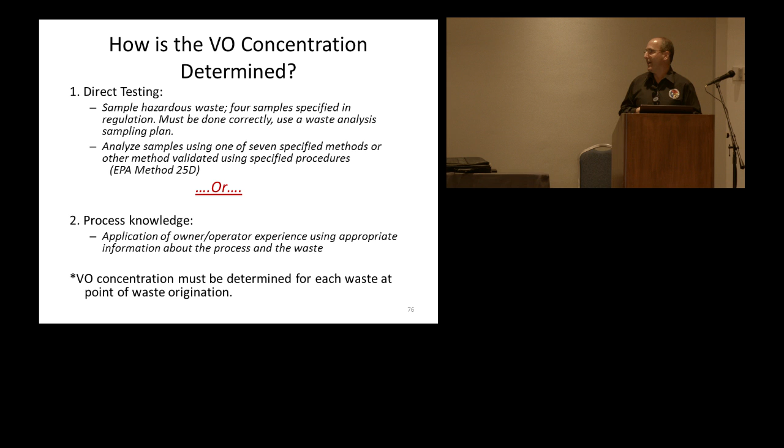The methods are, there's lots of methods for VO testing. EPA likes 25D because they think it's one of the better ones for doing a waste sample test for VO concentration.

And here's the reasons why. 25D, that's really an air VOC rule. Our lab will do it, not the county lab. We have a contract lab. I think it's $300 a test to do it.

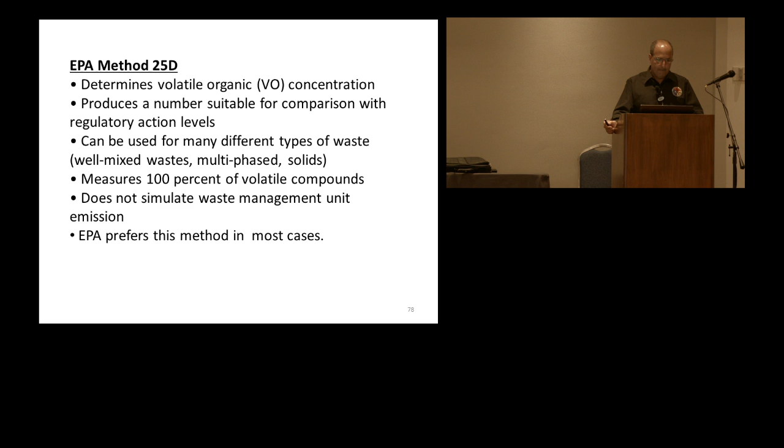Point of waste origination is key. They got to do it where the waste is first generated.

For tanks and containers, pretty much the same rules apply. You're caring about 500 parts per million. You got to know the vapor pressure. This is important because for tank level 1, which we'll cover in a minute, the controls that go along with that rule versus level 2, which are a higher standard of emission control, you got to know your vapor pressure.

You can do it by knowledge or testing. There's actually a test for vapor pressure that can be done. Sometimes they've done the 500 parts per million and they've documented it in the facility record, but they haven't done the vapor pressure determination, which is that second step you have to do.

And that's, I'll tell business, you got to do it by knowledge or by testing. Your choice, as long as you're right, whatever choice you pick. I haven't had to sample and do that because most companies have gone ahead and estimated the vapor pressure to be very high because the methylene chloride is 80% or something like that, and they can pretty much use safety data sheets and go from there.

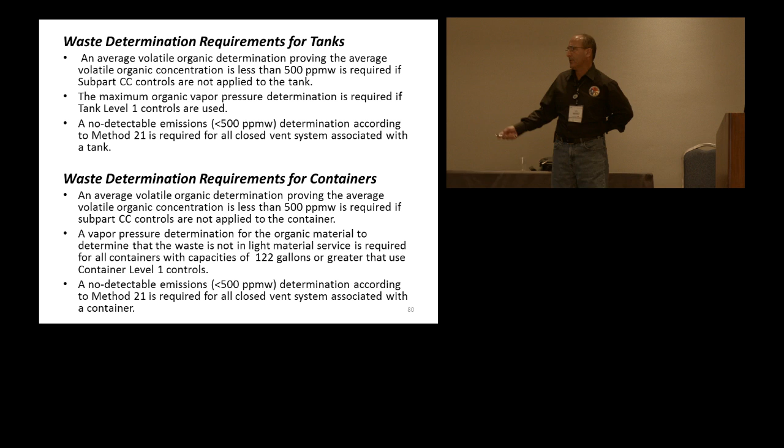There's something unique about light liquids material in bigger tank containers, I should say. We'll talk about it a little bit. And non-detectable emissions, we'll talk about.

Again, if they certify that they meet the Clean Air Act, Federal Clean Air Act, which is NESHAPS or New Source Performance Standard, which are pretty tough standards, and they certify that, they may be exempt from Subpart CC. I haven't had anybody do that. Of course, San Diego is not like LA with a lot of manufacturing.

We just have waste solvent transfer systems, and we have the Navy, for the most part, that I've seen. I'm going to do an outreach to our local industry group in San Diego, but the first thing I heard back when I offered to do the presentation, not 2 hours, but an hour about this, a lot of them say, oh, we're not subject to that rule. We don't want to come. So we're trying to get out to the big manufacturing in San Diego, which are building engines and painting engines.

And I think it's the ostrich sort of scenario, and it's not good because we're doing our best to get this out. I put this online 2 years ago. I put the guide online 3 years ago, so hopefully we can use the soft method of getting compliance.

Again, process knowledge, as long as they have the right answer, it's correct.

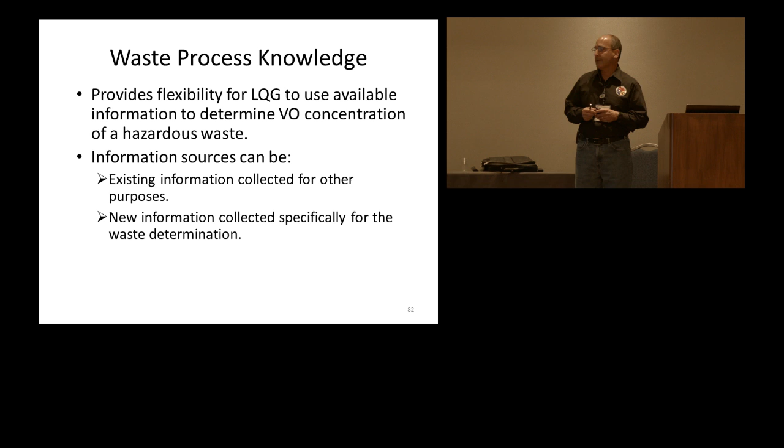So the 2 levels for tank vapor controls. Level 1 is really easy. It's really a closure device. Talk about that in a second. Level 2 is more extensive for tanks or containers. Level 2 is a control device.

So the 2 devices that are common in the rule are closure devices, which mean you have something that's closing every time the tank is done being filled or having stuff going into it. Or you have a control device where the vent is open-ended, going to carbon, for example, which is very common. So the difference is closure, and control actually allows the open vent going to like activated carbon to adsorb it. Level 2 is expensive. It's activated carbon, it's thermal flares, burning off vapors, it's condensers, it's all kinds of elaborate, very expensive air pollution control devices.

Harder to inspect. I've had level 1 mostly in LQGs, because they want to keep their tanks closed, not have an open vent. But I have one I'm working on now where they built it wrong, and they have an open vent scenario, and I'm trying to figure out what I'm going to do about that one with them.

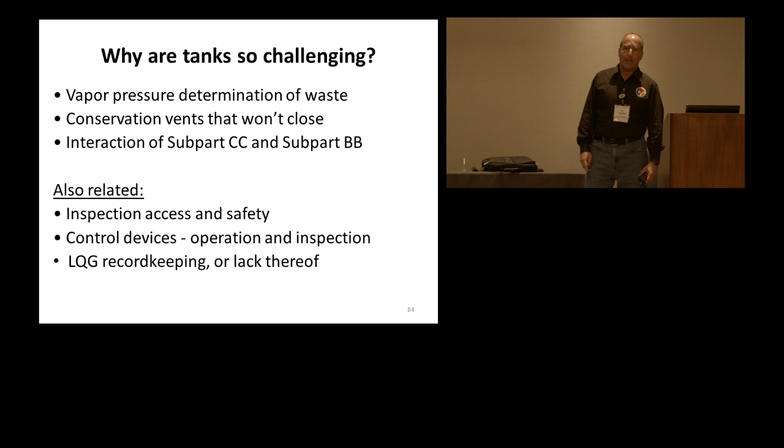Vapor pressure is a key determination, as I mentioned, between level 1 and level 2. You've got to know it by knowledge or testing. If you go to level 2, emission controls, it could be $8,000 to $10,000 annual cost to meet CC.

Because you're having a control device, you have activated carbon. You have to get rid of that. You have to monitor it. You have extra piping for the vapors from the tank that is actually leaving the tank.

And that's usually a high production facility - places that are generating, every 90 days, a lot of waste solvent. In my cases, every one of them has been like a weekly pickup. For my waste solvent guys at biotechs, they get the 4,000 gallon - one company called Illumina. I'm not going to, because they're really good, compliant.

Illumina is in San Diego. They're like a multi-billion-dollar company. Every week, 4,000 gallons of waste solvent. And they know they're on the radar because they have so much waste being generated. So I tell them, you guys really need to look at this rule, and they're well ahead of the game.

Conservation vents are very easy on a tank. They're a valve that sits on top of the vent, on the tank top, and they allow, when the tank is being filled, for the headspace to go somewhere. It closes right after the tank is being filled, so it conserves the vapors - hence conservation vent.

Required to prevent, of course, overpressurization of the tank. You can't have the headspace - it has to go somewhere when you're filling it. And there again, they conserve the contents. Very common with them.

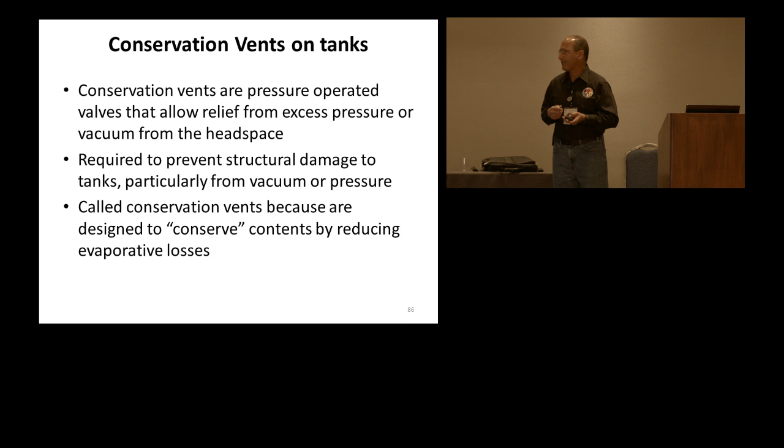Level 1's most common, like I mentioned. Can't have a tank that's heated - I don't see that. Heating waste tanks, unless they're doing distillation, which is extremely rare. I usually see small container units. They can't do waste stabilization in a tank for level 1.

If they're doing anything in a tank other than collecting waste - stabilizing, treating, heating of the waste. I've seen heating of the waste once where a company had a very viscous waste and they heated it in order to achieve pumping. That got them into a little bit of VOC issues when they heated it, to allow pumping.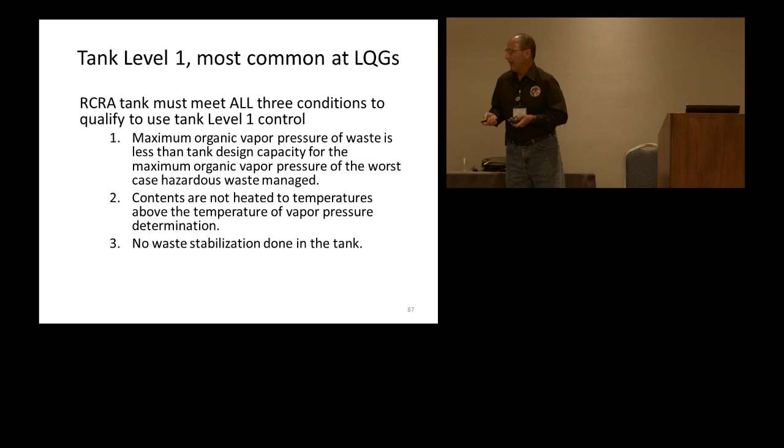Tank level 1 is also called a fixed roof. And again, they're inspecting the openings to make sure everything's closed and properly being maintained.

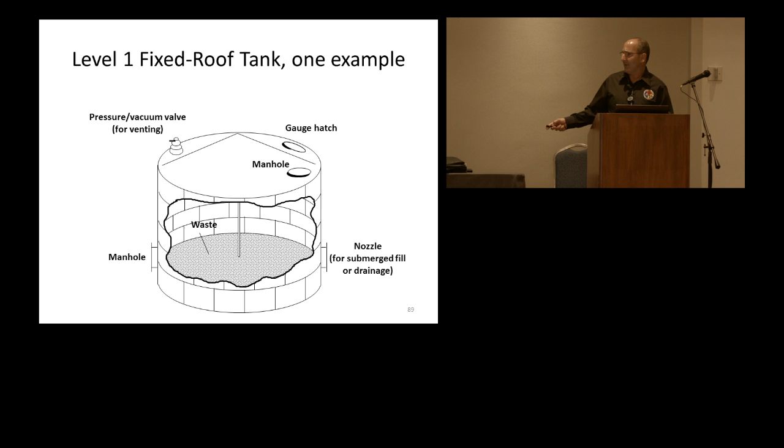And here's like a picture of kind of a tank. Everything's closed on top. Typically, there'll be a pressure relief valve and a conservation vent or something. But if there's an open vent or an open manhole, that's a problem.

Some companies have been caught where they leave the manhole partly open during the summer, to allow the waste to evaporate - not in California, but in other parts of the country. EPA's caught them, because they can allow the waste to be evaporating on a hot day in Texas. Your waste reduction is your... yeah, really.

Common problems for level 1 tank inspections: closure devices left open, hatches, caps, bolts missing. I've gotten pictures from other inspectors in other parts of the country showing these problems, and EPA has it on their website. Also conservation vents that go bad.

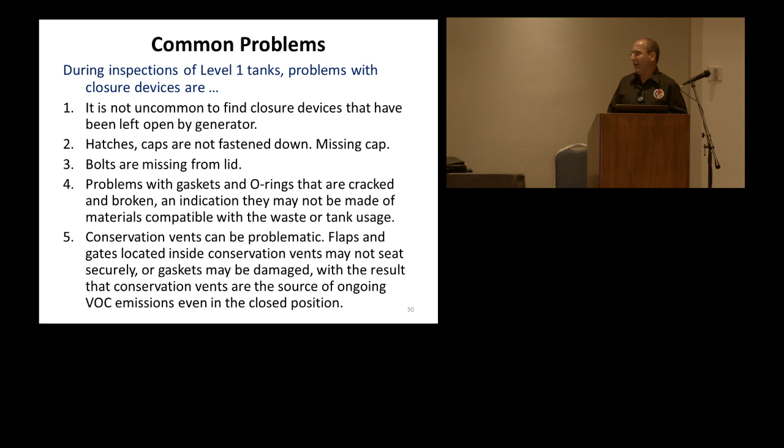Tank level 1, or tank level 2 if you can't meet level 1, which is a closed tank or a conservation vent. If not, you go to level 2, where you have a control device.

Tank level 2 are typically vented, like that one that was venting to a carbon drum. That's level 2 control. If it's a pressurized waste tank, probably level 2 is needed. If they have a tank in an enclosure with a combustion flare on top to burn off vapors from a tank vent, that thermal destruction unit is level 2.

Internal floating roofs, haven't seen any in San Diego for waste, but you see it for gasoline. And then external floating roof, not very common in my neck of the woods.

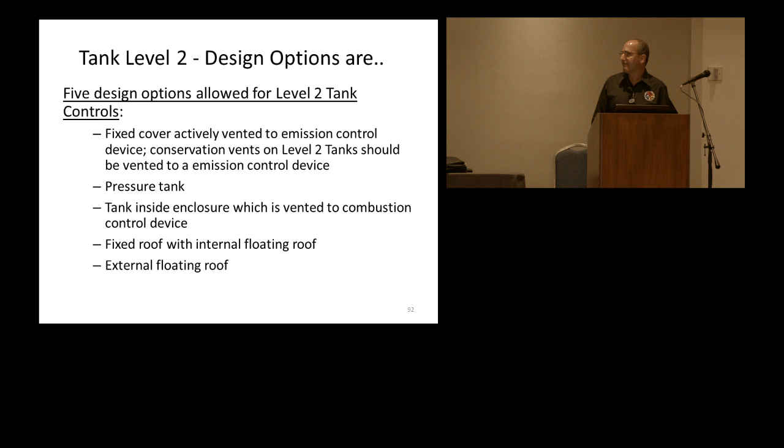Vapor recovery units for level 2, you can have a condenser, typically on top of an air stripper or steam stripper, which condenses out the volatile organics. And activated carbon, very common at LQG RCRA facilities.

The most common issue is the used carbon. The spent carbon is not changed out frequently enough, and they get breakthrough, meaning the vapors go right through the activated carbon and out through the exit port on the drum or unit, right out to the air. You may not smell it, because a lot of times these stacks go up to rooftops. So you have to use your knowledge, your experience, and ask questions.

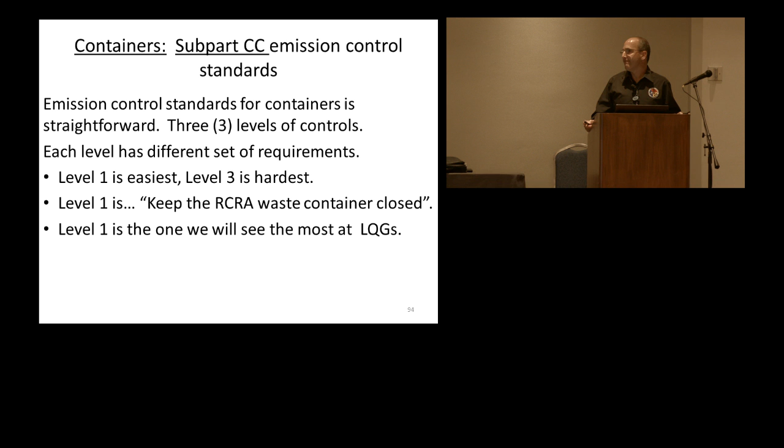Subpart CC, the last part, for containers. Level 1 is the easiest - all it is, is keeping your RCRA container closed. Pretty much that's it for level 1. Level 1 containers are 122 gallons and below, drums for example.

Keep them closed. If you have level 2, which are like the big giant tote I showed earlier in the presentation, level 2 controls no splash loading from the top, and you've got to keep them closed. You have to have a closure device or control device on these bigger totes, bigger containers.

Level 3 is for people treating volatile organic waste in containers larger than 26 gallons, but I have not seen that. It's waste stabilization, where they have a volatile organic waste and they put in stabilizing, curing material to cure or stabilize the waste, fix it, almost like cement. Not very common.

Again, with containers, they can visually inspect them for leaks, no problem. No additional records are needed unless using level 3, which is your treatment containers for VO waste - I haven't seen it, and it's very rare. Very, very easy to meet if you keep the container closed.

But that last bullet is kind of important. I've seen cases where they keep the tote open, at least the cap open, because as they're filling it, the headspace has to go somewhere or there'll be back pressure, and then they'll have a problem at the pump that's pumping waste to the big tote.

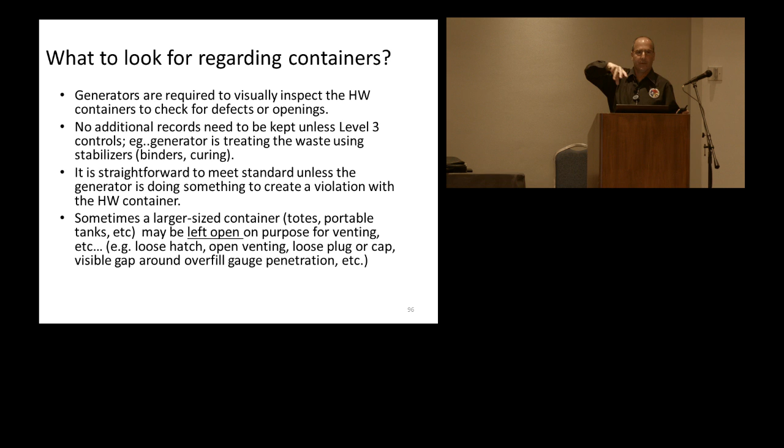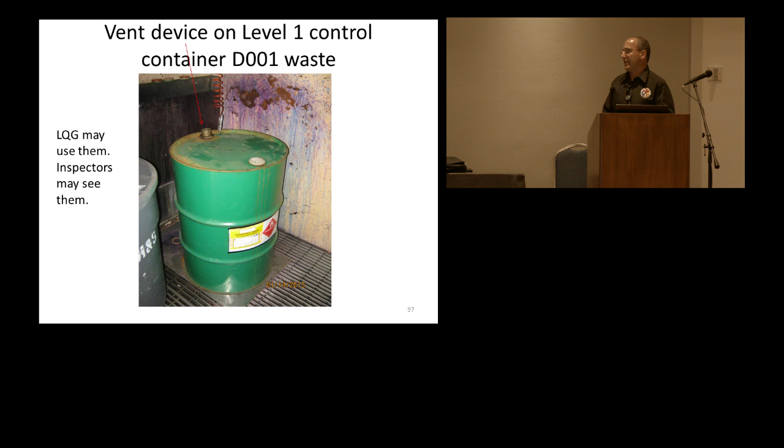Vent devices on drums are allowed as long as they're working and kept closed. Of course, if they have an open lid or open cap, that's a violation. Again, very easy to meet level 1 controls for containers.

So it was the transporter that came with the wrong truck. If you're in a business generating waste and you've got a VOC waste, and you have a transfer occurring from totes or drums or tanks, whatever, you make sure they come with a vacuum truck that has some kind of emission control on it. Because if it's not a used oil truck you want showing up, you want to have something that has emission controls. Downwind is when the 911 calls occur, and we've been out on a few of those.

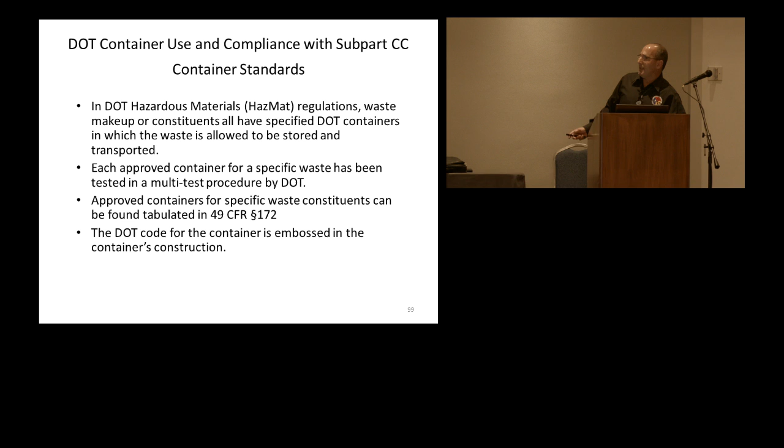Again, a DOT container is fine, which is allowed for container. Containers are easy for this rule, it's got to be a DOT container. So if the DOT container is not spec'd for that volatile organic waste, it doesn't meet the DOT container requirement, as I just mentioned. For level 2, again, you've got to have a container that meets DOT, usually a bigger container, more than 122 gallons. No emissions can be detected, and it must be vapor tight.

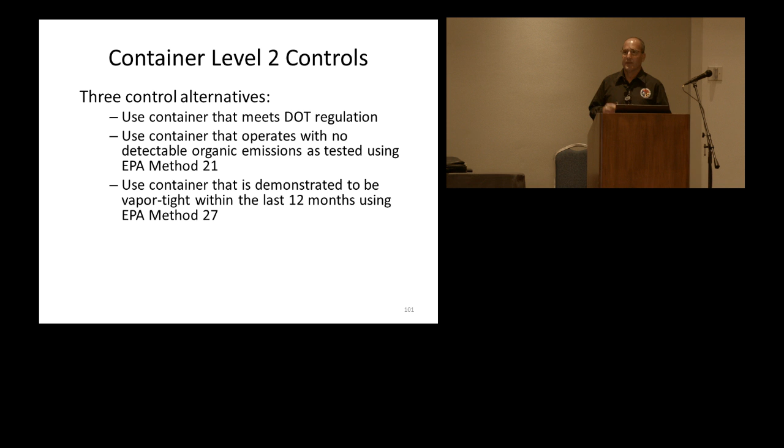Usually this is all TSDFs or transporters. A transporter with a truck, a vacuum truck, is regulated by container level 2. They're not exempt from the air emissions requirements. Matter of fact, they're the ones that need to be most closely watched for odor complaints or emission complaints during transfer. They can't have splash loading in a tote if it's a large tote with VOC, because the vapors just come right out that splash loading port. You've got to have it closed down.

Level 3 is typically a TSDF. A TSDF that is getting totes coming to them, and they're in an industrial area with neighbors around, may have an enclosure where they'll open up that tote and do all the sampling and transfer they want to do. And they have to have an enclosure with a combustion control device or an activated carbon unit or some kind of enclosure that will exhaust out. Because if you're sitting in the middle of LA and you're transferring hazardous waste from totes to your TSDF without any kind of closure device or enclosure, people downwind are probably going to complain and call. They've got to do the transfer carefully.

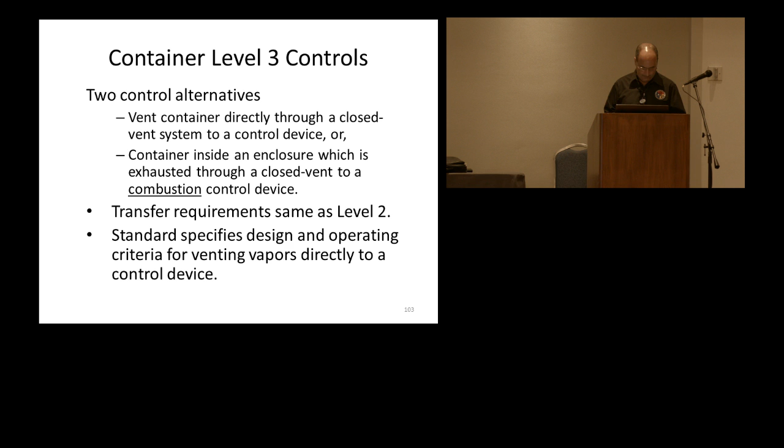The enclosure rule is actually a very, very tough rule to meet, but a TSD will meet that rule in order to get a permit. If they're opening up totes all day long, pumping them out, and then treating the VO waste or bulking the VO waste, that's their business, and they'll meet it. I haven't seen any generator build an enclosure. One company talked about it, but they didn't, the cost is so high.

And lastly, in San Diego, we hired a dog to detect VOs, volatile organics. He works cheap, for dog biscuits. And that is pretty much it. The last slide for the presentation is, if you're a business with VO waste, the liability and risk is very high. You can see what's happening up in Hanford, a big lawsuit, a lot of workers complaining. Workers will complain to OSHA, but sometimes it leads into RCRA because it's dealing with hazardous waste. You can have fire, worker exposures, and those kinds of issues. It's very intricate. We have a guide, as I mentioned, and there are a lot of good online tools and guides available.

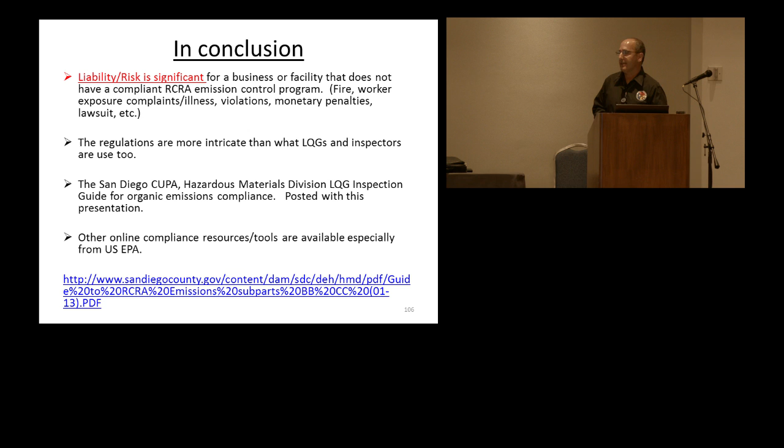So, with that, any questions? It's a little complicated. I find it really interesting because I'm kind of moving on to something more challenging, and this is a challenging rule to implement. So my advice as inspectors is: look at it, assist the business, show them where the guides are. The ones that are truly problematic, where you get odor complaints and you go out multiple times and they're not fixing the problem, look at this rule. It may not just be a generator failing to keep the container or tank closed, it may be this. So you'll look at these rules and apply them. That's it, thank you guys.